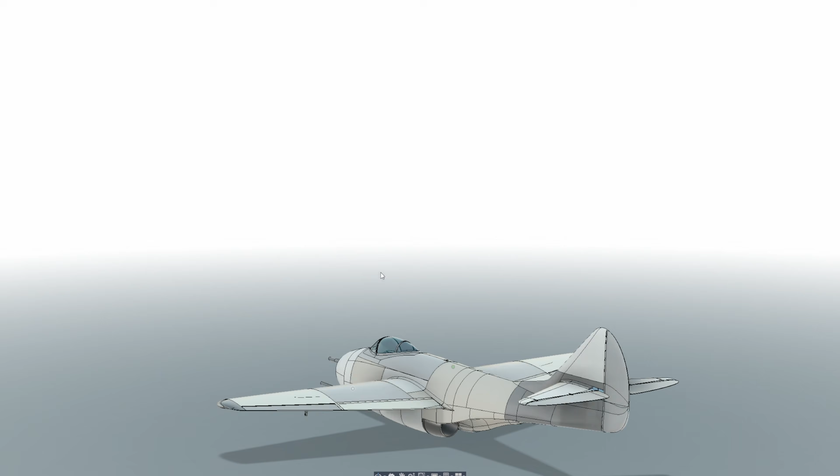In this case, the full-size aircraft is going to be about 1500mm in length, and I'm scaling that down to 900mm for the flight testing. This video is primarily focused on the 64mm mini test jet, but I'll often refer to the larger jet to give context to my design decisions. For the larger MiG, this is going to be my first twin-engine EDF jet, but for the mini sample, I want to try bifurcating the thrust tube to keep the electronics as simple as possible. It'll also be my first time trying to do that, so I'll need to test it out on the thrust stand before I commit to it, but I'll come back to that at a later point.

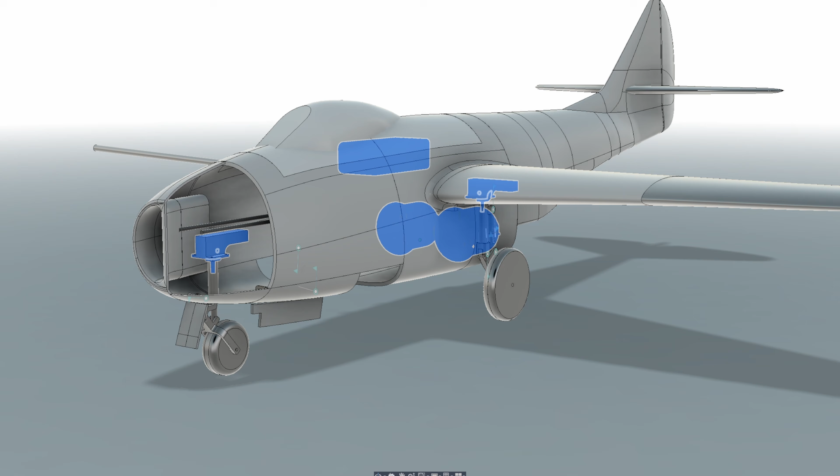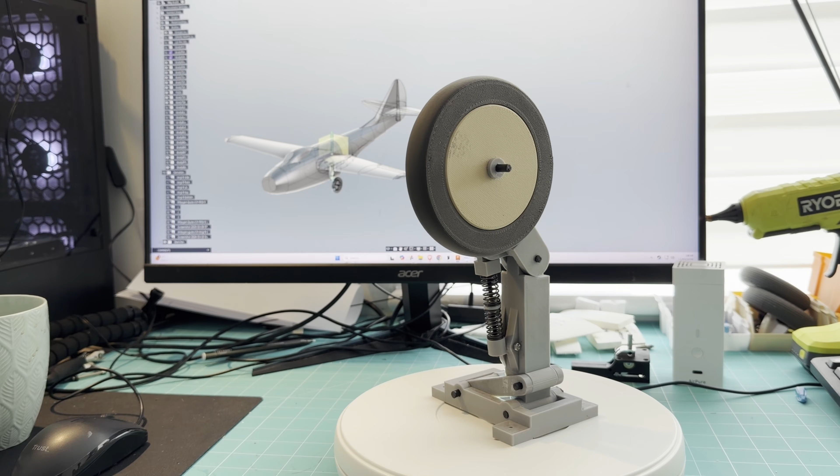Another reason I always start with the bigger CAD model is because I try to get all the electronics sitting roughly where they need to be so that I can determine the scale of the aircraft. The size of the larger model was mainly informed by my fatigue with the 3D printed landing gear problem. I've spent many months trying to get the plastic 3D printed landing gear to work, and I've had some success but also a lot of failures. The larger aircraft was originally going to be 1700mm long, and I tested the main 3D printed landing gear up to 6 kilograms in 200mm static drop tests.

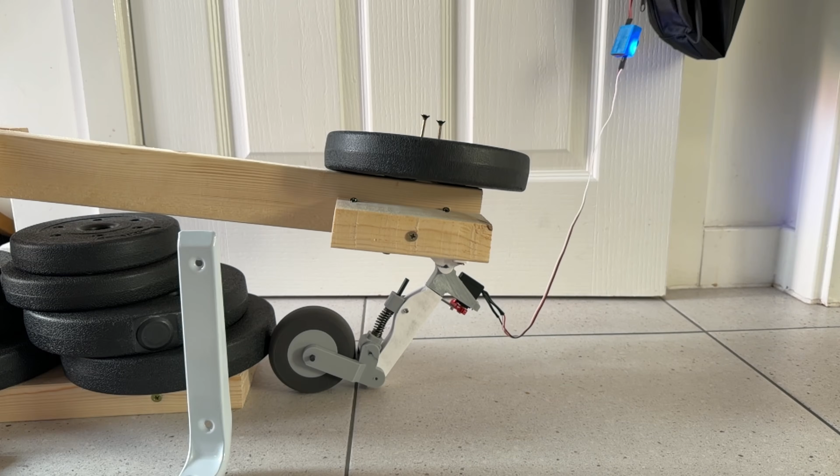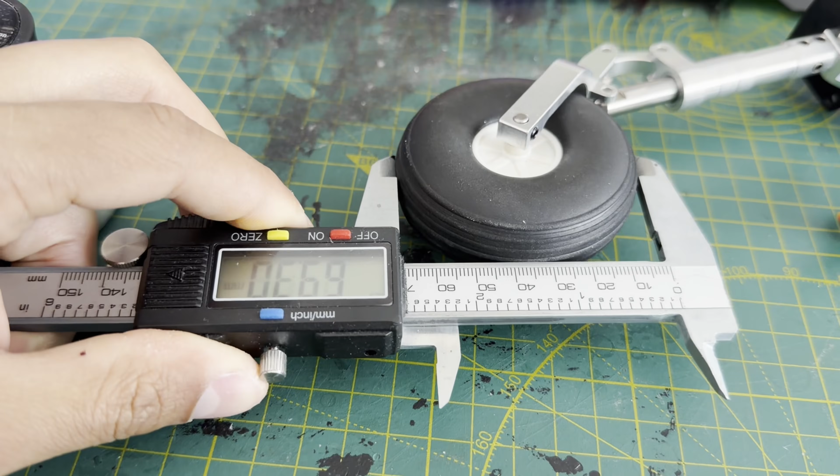However, I wasn't able to design a functional, steerable, retractable nose landing gear that could perform up to even 3 kilograms in similar static drop tests. I'm sorry to say that I've indefinitely shelved that line of inquiry, and through that humbling experience, I decided to scale the aircraft around what I could find in terms of off-the-shelf landing gear components. To keep everything proportionally accurate with the landing gear I purchased for this, the aircraft is limited to 1500mm in length. I don't want the MiG-9 project to be completely devoid of experimentation, however. So one of the options that I'm looking at is getting the main landing gear 3D printed in aluminium. I'm really excited to see how that goes.

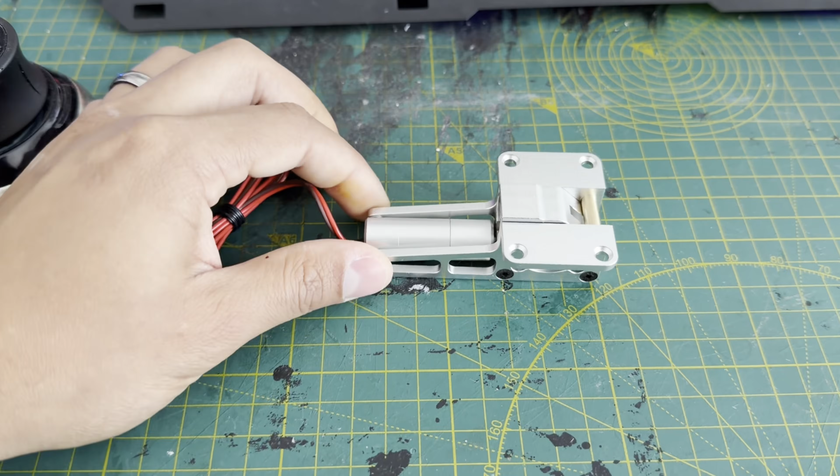The airfoil thickness was informed by the landing gear. I intend to use some off-the-shelf JP Hobby retracts for the aircraft in combination with some scale-looking metal 3D printed landing gear. So I mocked up the various landing gear components and essentially drew the airfoil around them. That means the airfoil is a little bit more rotund than the actual MiG-9, but compromises have to be made at this scale.

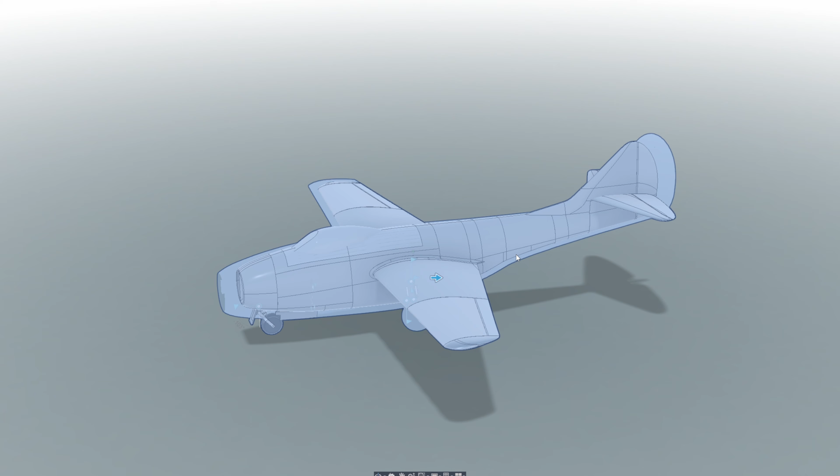So all of that information is relevant to the smaller jet because after confirming the abstract details of what the final jet is going to be in terms of shape, I scaled that exact model down to 900mm, thereby keeping all the details essentially the same. That should give me a truer image of the aircraft's flight characteristics and allow me to make informed decisions when I start major work on the larger aircraft.

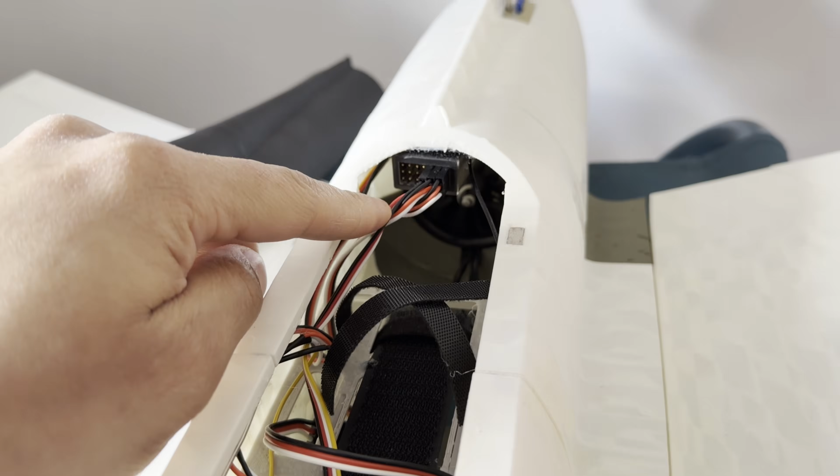The Mini MiG will be my second smaller aircraft, and I want to take some of the lessons that I learned from the Mystere 4 project and apply them to this aircraft. With the Mystere, I tried to use a grid printed out of PETG to mount the electronics in the aircraft. I chose this because I used Velcro straps to secure the LiPo battery onto the airframe, and I've had issues using Velcro straps adhered directly to lightweight PLA surfaces.

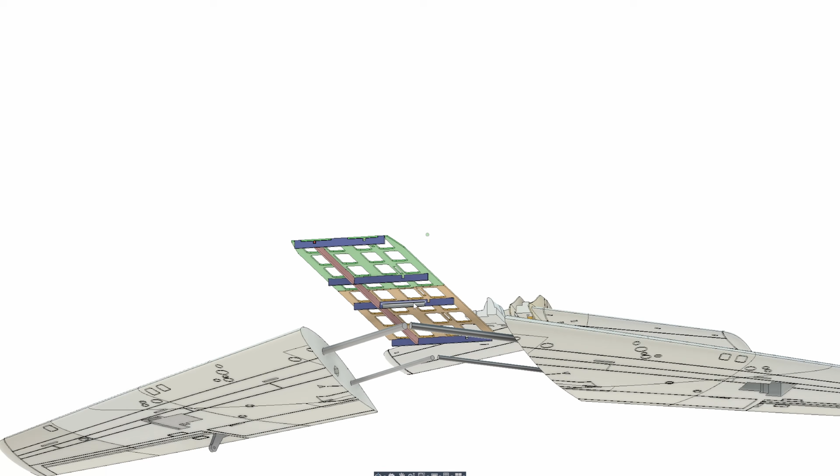It may be my settings because I tend to print with as low a flow rate as possible to reduce the weight, but I've found with repeated action of taking the battery off, it weakens or damages the print. The solution with the PETG grid removes that issue, and the gaps in the frame are great for mounting electronics and feeding wires through. The grid was composed of 8 unique parts and it had to be assembled separately.

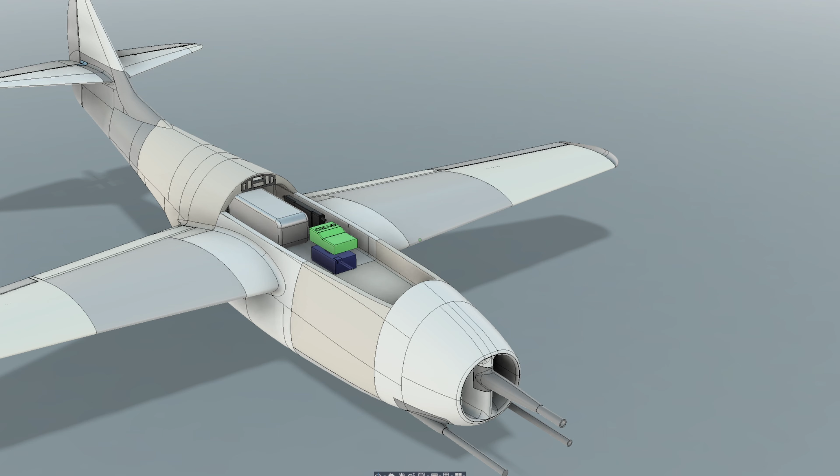I ended up having to rebuild the Mystere 5 times trying to get it to work, so I became very well acquainted with some of the design choices that hindered rapid prototyping, this being the main one, and it forced me to ask if there's a simpler way to mount the electronics. For this prototype, I'm designing the battery and electronics bay into the main fuselage, and this time I'm going to try glossing the mounting surface with finishing resin to give it some rigidity. If that fails, I'll print a thin layer of hard plastic for the mounting surface where it needs it. That should cut down the build time and complexity in the forward fuselage.

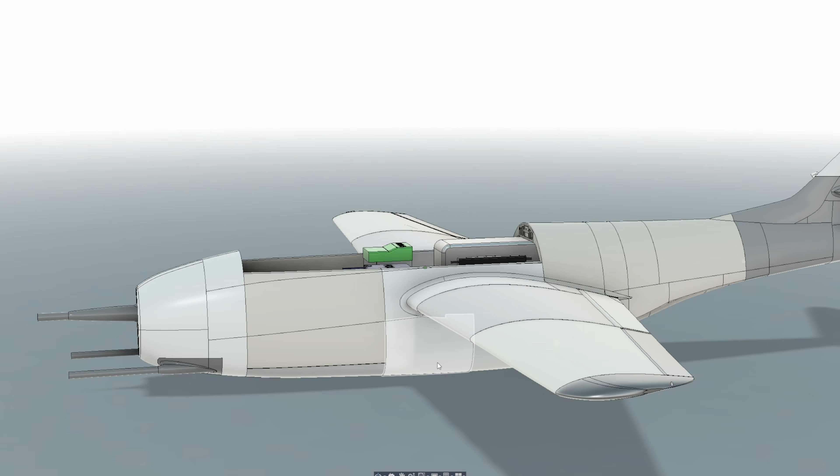Thankfully, the actual MiG-9 has a relatively thick airfoil to begin with, and I thickened it even further to accommodate the landing gear and electronics on the full-size model, so I'm hoping that this aircraft is going to have relatively benign flight characteristics. I couldn't find any specific information about the MiG-9's wing incidence and washout online, so I opted for a conservative +2 degrees at the root and -2 degrees at the wing tip, the twist starting roughly at the halfway point of the wing.

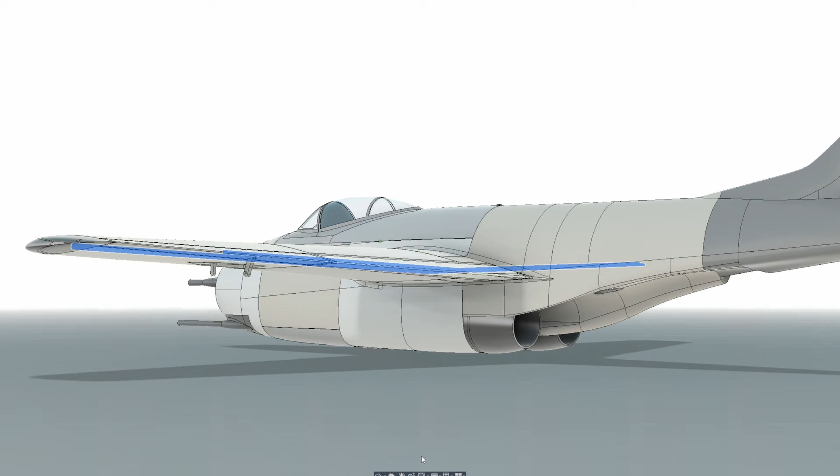I'm using 5mm carbon fiber tubes for the main wing structure and a supplementary 3mm rod closer to the trailing edge. This may be a bit overkill, but since it's a 64mm jet, I'm feeling better safe than sorry.

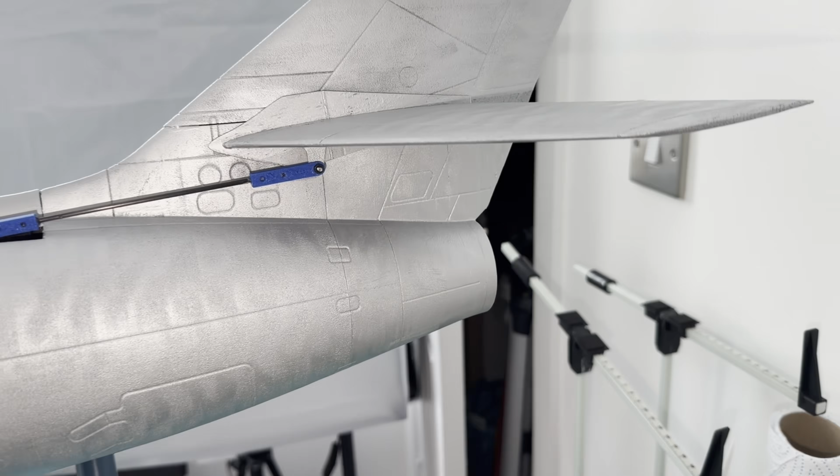I'm planning on giving this aircraft a bunch of scale details once I get it flying, and to that end, I want to try adding false flaps and a rudder to make the distinction between the wing and the flap surface more apparent. On my last aircraft, I tried modeling deeper panel lines to denote this separation, but I think this effect will be a lot better. It does add a little bit more material than necessary, and naturally the false control surfaces need to be printed separately, thereby increasing the complexity of the overall build, but I think the effect will be worth it.

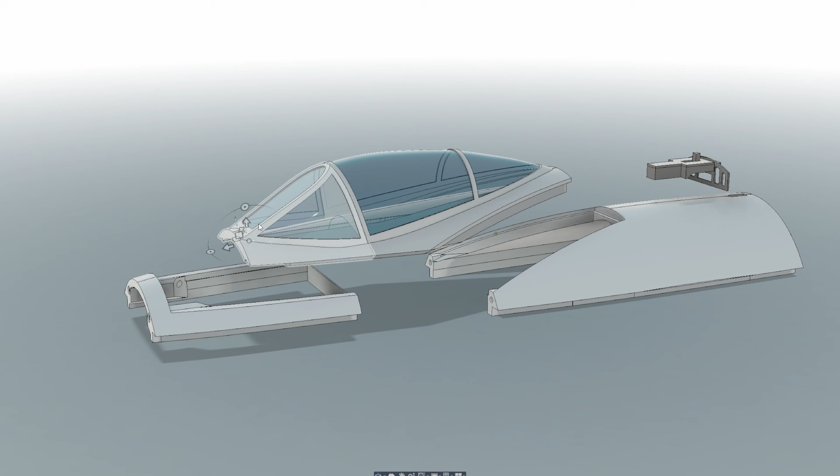I can never really help myself when it comes to the canopy details, so I went ahead and added them in. I intend to print this out of transparent PETG.

When I designed and started testing the Mystere, I really struggled to get the thing airborne. The most frustrating aspect is that for the most part it wasn't the fault of the aircraft. I kept throwing and launching the thing wrongly, and I lost a good few prototypes to poor technique. My initial solution at the time was to build a standalone catapult launcher for the jet, and though it was a fun experiment in launching stuff, I couldn't quite get it to work when the time came.

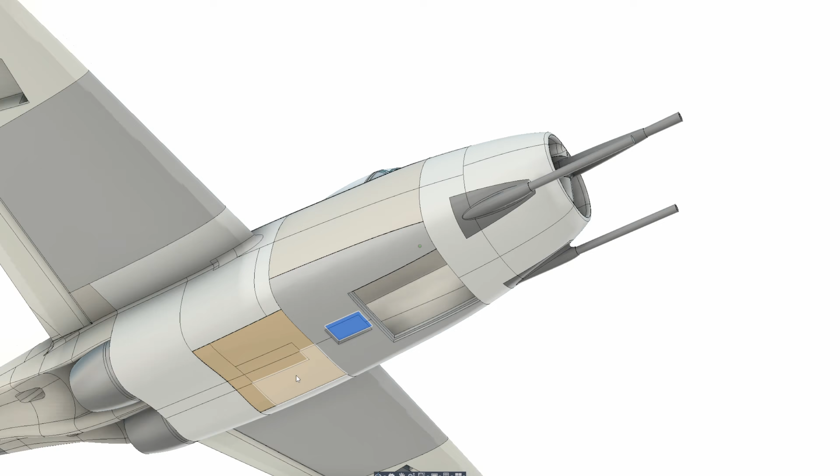I was recommended by a few people to try a more conventional catapult design, and they even shared a few links with me, so I'm going to be trying to use that on this aircraft at some point. I've also had the opportunity to practice using a chuck glider recently, and that's improved my confidence somewhat around hand launching, so I want to try that at least once.

This aircraft is going to need an auxiliary vent for the 64mm EDF, as the nose intake isn't quite big enough to supply enough air to the EDF. On the previous aircraft, I opted for a gaping hole in the bottom of the aircraft, which I didn't particularly like from an aesthetic perspective, so this time I'm going to do something like a grid. I should be able to paint over it, which will allow it to blend in a little bit more.

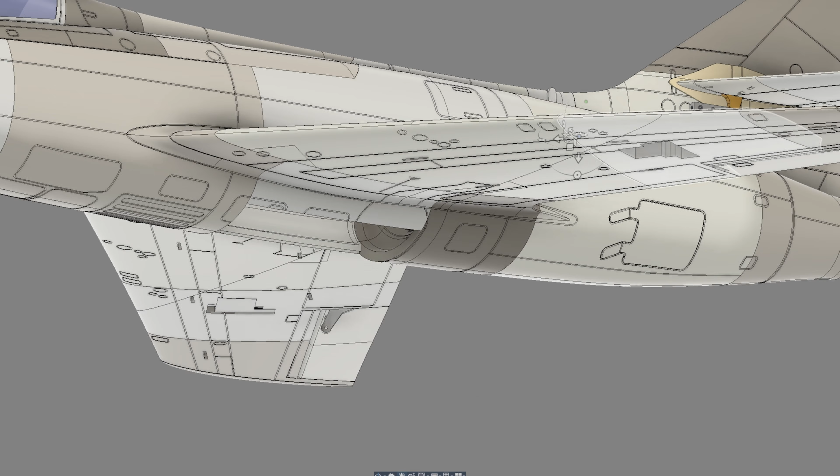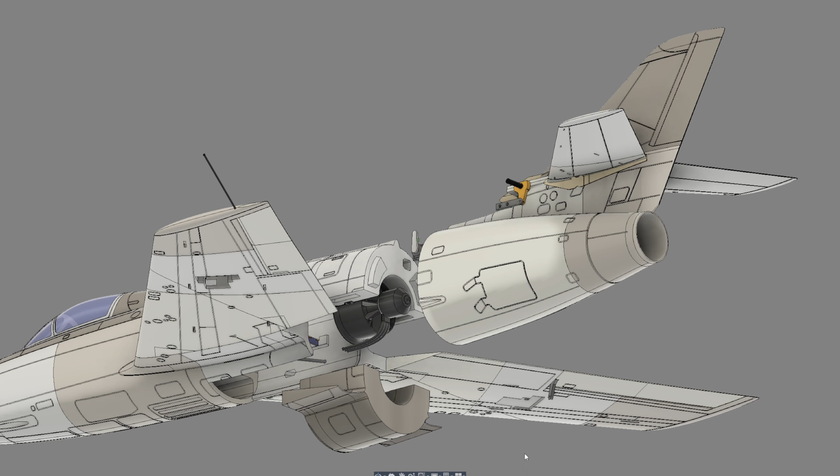One of the smaller design changes I made to this aircraft concerns the EDF installation. On my previous aircraft, the way I designed the fuselage meant that the EDF assembly had to be installed partway through the build. Once the main structure was assembled, there simply wasn't enough access to fit the unit afterwards, so it had to be committed relatively early in the construction process. Whilst this wasn't a major problem, it did make the assembly sequence a little less convenient. Having the EDF installed relatively early meant that I had to work around it for the remainder of the build.

This made things a little bit more awkward when it came to painting, but other than that, it wasn't the end of the world. For this design, I reworked the mounting arrangement so that the EDF could be installed after the airframe was complete. It's a fairly minor quality of life improvement, but it makes the overall assembly process cleaner and more flexible.

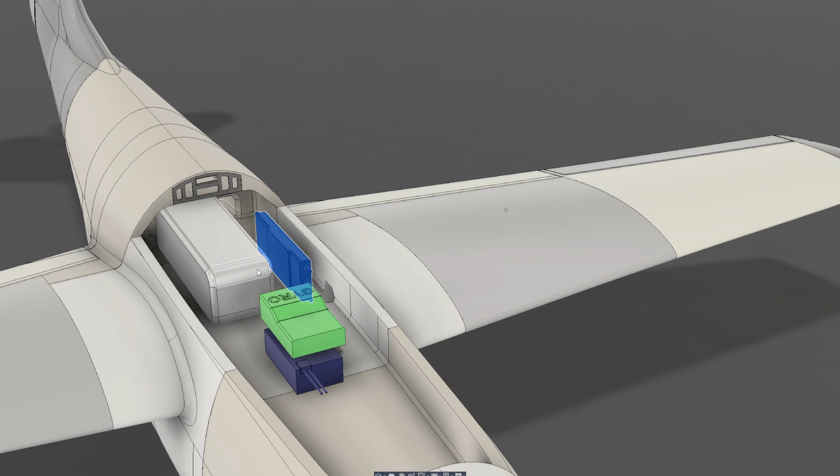I've opted to try and fit the ESC on the MiG-9 inside the main electronics bay rather than having it sit in direct airflow in front of the EDF as I usually do. To compensate for this, I've incorporated a series of cooling channels to encourage air to pass through the main compartment and carry any excess heat away from the electronics.

I'm optimistic that this should be enough cooling, particularly since the aircraft is going to be running on a 40A ESC on a 4S LiPo, which has generally run pretty cool in my experience. When I get to bench testing the fan, if I find that the ESC is running a little bit hotter than I was expecting, I'll mount it in front of the fan as I usually do.

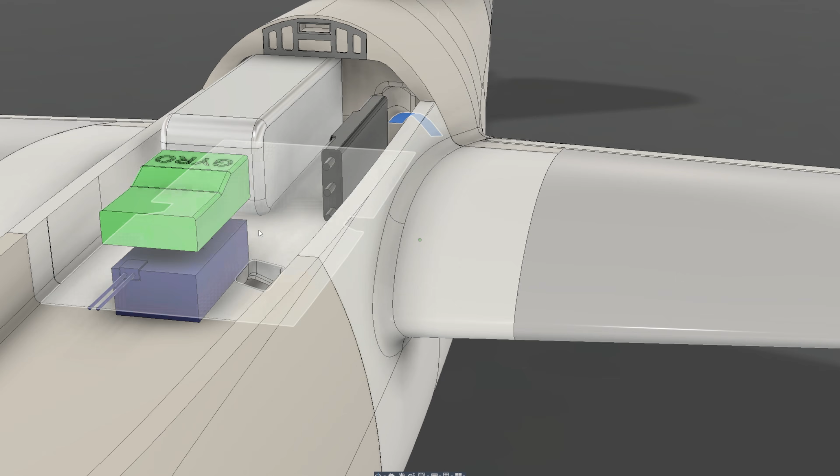I've experimented with both magnet and mechanical latches for securing the electronics hatch, and whilst magnets are really low profile and convenient, I've decided to return to the hatch latch for the MiG-9. The main reason being I want the canopy to actually hold the flight battery down as opposed to using Velcro straps. This time I've designed it in such a way that the canopy can hold down the battery in the vertical axis, and I wouldn't trust magnets to do that job.

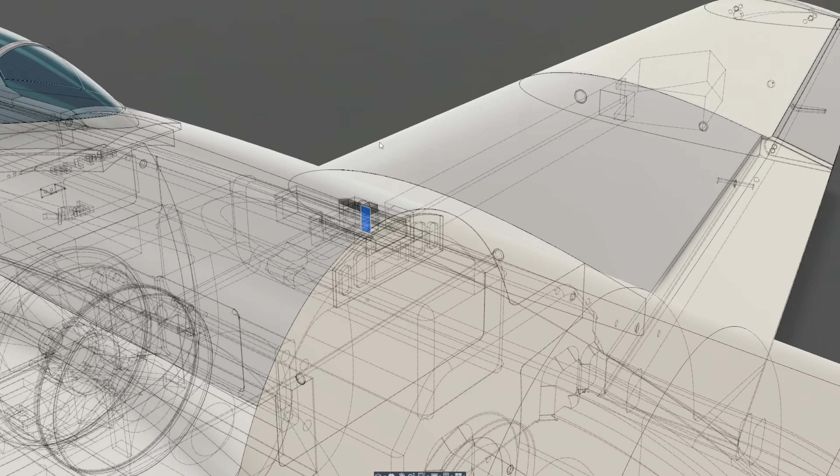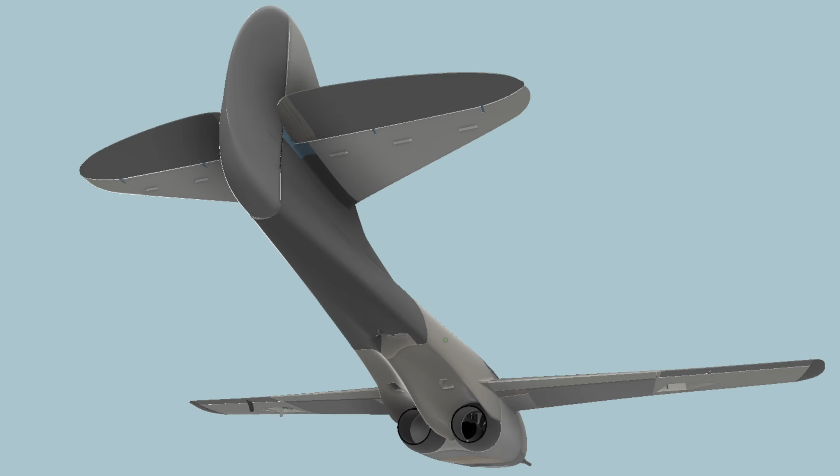One area where I wanted to keep the aircraft looking as clean and scale as possible was the tail control. On my previous aircraft, the tail control arm was completely exposed, which is perfectly functional and convenient, but it does detract from the appearance, and it still bothers me today. For the MiG-9, I decided to hide the tail control arm inside the structure of the aircraft, and once the aircraft is completely assembled, the linkage should be completely concealed.

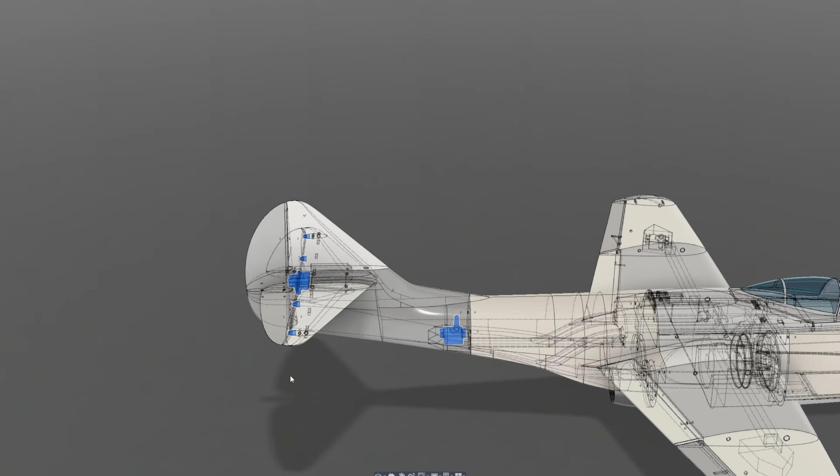There's very little space in this part of the fuselage, so access to the servo and linkage isn't going to be as straightforward as it would be if the linkage was exposed. It may take a little bit more patience, but once it's installed, it shouldn't be a problem. Ultimately, I think it's a worthwhile trade-off for that scale factor. When the panel lines are on and the false flaps are installed and I get to painting this thing, it's gonna look immaculate.

The MiG-9 cannons project a considerable distance ahead of the nose, and I really want to include this feature as it wouldn't be a MiG-9 without them. Since this aircraft is intended to belly land on grass, those projecting cannons stand a major risk of snagging on the ground and causing damage to the airframe. To mitigate this, I've designed the guns as separate parts to be printed in lightweight TPU. The flexibility of the material should allow them to bend if they do get caught, reducing the likelihood of damage. I'm also considering mounting the lower guns with magnets so that in the event of getting snagged, they simply detach rather than damaging the airframe.

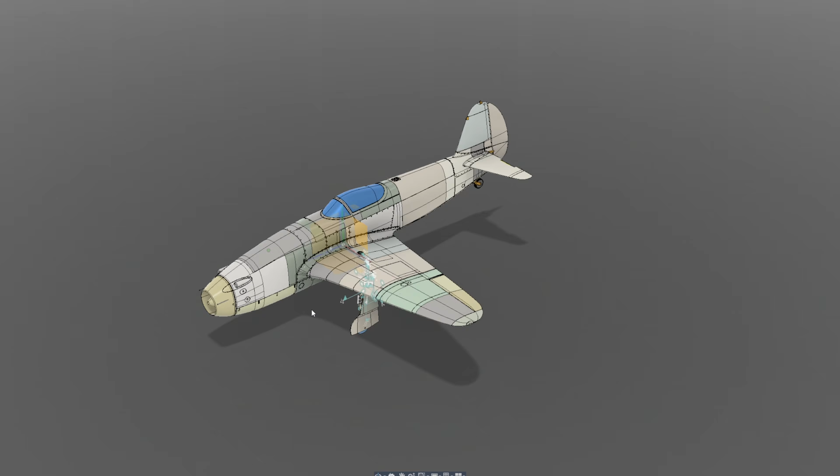When I built the Yak-15, I ran into some problems hand launching the aircraft because the thrust line is sat below the center of gravity. As soon as power is applied, the offset between the thrust line and the CG generates a strong nose-up pitch moment. At low speeds right after throwing the jet, the wings and horizontal stabilizer weren't producing enough aerodynamic force to counteract the pitch-up moment. The result was that the aircraft would begin rotating nose-up long before it built sufficient flying speed, making hand launching extremely difficult.

Generally speaking, this problem disappeared once the aircraft had reached flying speed, but ultimately I was never able to successfully hand launch the Yak-15. I'm concerned that the MiG-9 may suffer from a similar low-speed handling problem, as the engine configuration is very similar to the Yak-15. To counteract this, I've added 3 degrees of down thrust.

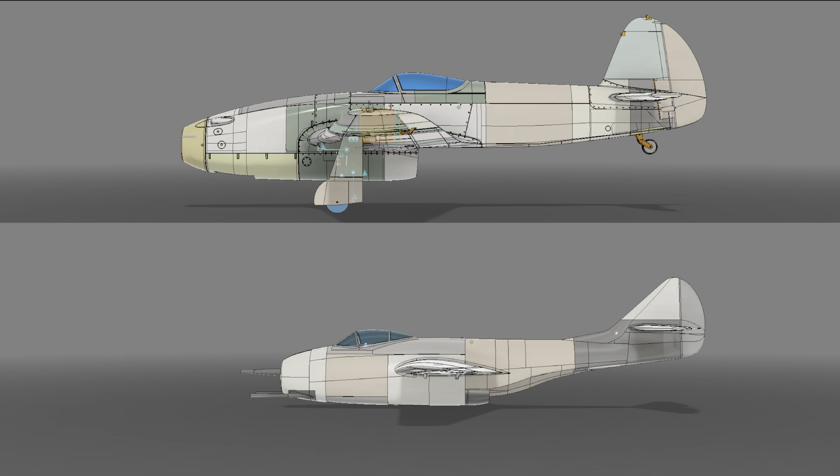I really try to avoid compromising on proportions where I can, which is the main reason for the conservative angle. I must admit that in most instances I would choose form over function. And given that the thrust line is closer to the CG than the Yak-15, I'll start with this, and if it proves to be insufficient, I'll see about increasing down thrust or switching over to bungee launching to keep the proportions looking right.

The MiG-9 is one of the aircraft that I've been considering for my new FPV system, and I'm really trying to make an experience that is so realistic, and in order to do that I have to make an aircraft of a certain scale. I've been designing a few different aircraft over the past few months, and I've realized that the earlier jets have a distinct advantage in my case because the full-size aircraft isn't as big as something like, say, the Blackburn Buccaneer, which, if I wanted to achieve a certain canopy size, would need to be relatively large, whereas for something like the J-29 Tunnan, I would say a 1.5 meter aircraft would be perfectly acceptable.